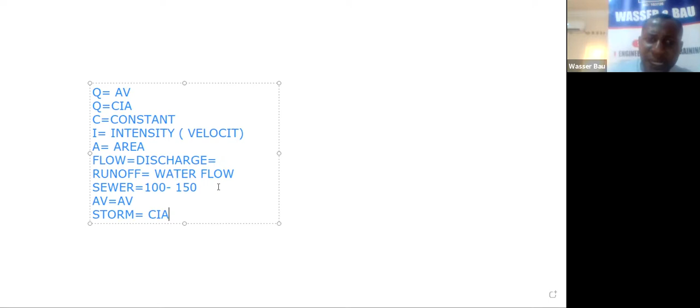Runoff coefficient. Why do we talk about C now? In the case of sewer, C is a factor of safety. C will be the factor of safety because after multiplying the specific wastewater demand for one person by the number of persons, you have to multiply by a safety factor.

We are all engineers. There's no engineering design that you do that you don't consider safety factor. This safety factor is what takes care of some unforeseen design lapses, or takes care of some escalation of population, escalation of development, change in land use, water losses. There are many uncertainties that an engineer will face.

So when you finish your design, there's always the safety factor that we put to multiply so that it will take care of some inconsistencies. But in the case of the sewer, the safety factor is defined in the code between 1.3 to 2.5. Just choose based on the number you are designing for.

But in the case of storm, your safety factor is going to come from two variables: the slope of that area, and what we call peak runoff, or the degree of paving, the imperviousness of that area. The higher the imperviousness of an area, or the higher paved an area is, the more it will contribute to runoff.

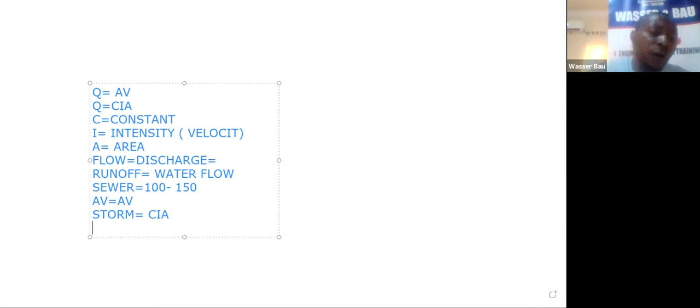...of all the rainfall that comes to it. So if you now go and do a design where all the water coming in a certain catchment is going to the drain, then you can only imagine how big that drain is meant to be.

So to curtail that, approving authorities will always make sure that you have gardens, open spaces, so that there will be a lot of shallow and deep percolation, infiltration, so that it will not be overwhelming for the public sewer.

Yeah, I'm recording, sir.

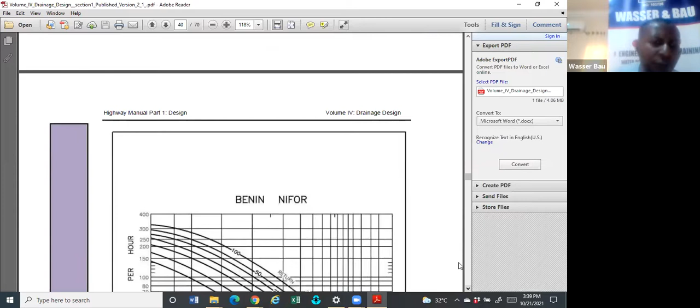So here you will see, for instance, this is what you'll be seeing in all of them. This is Benin Nifor, for instance. If you go down, you see other cities. The next one here is Bida. So if you are doing your storm design in a place around Bida, you are expected to go to the highway design manual and pick up the IDF, the rainfall intensity of Bida, for your design.

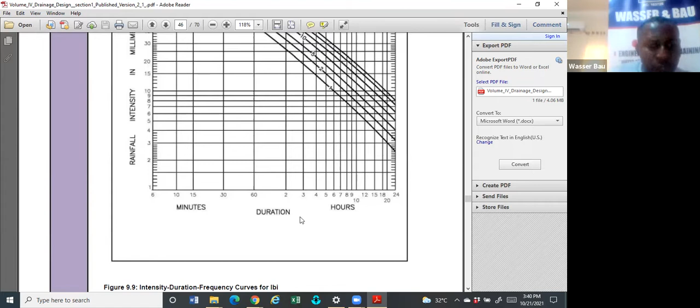So now if you go further, you see other things that might be news to you, but this is only what is in the highway design manual. Here you have the rainfall intensity on the vertical axis, and the duration on the horizontal axis. On the diagonal axis, you have the return period of each rain.

We'll still come to all those ones. Every rain has a return period: is it a 1-year rain, 2 years, 5 years, 10 years? The number of years is an indication of the probability of occurrence, which is also a function of the intensity.

I always say this: an engineer who designs infrastructure must design based on worst case scenario. This is what I tell my participants. In infrastructure design, it's better to over design than to under design. Under design is dangerous. Over design, okay, you're going to spend a lot of money, you're going to spend extra money. Somebody can tell you you're wasteful, but the design will work. But under designing, the design will fail even before it starts working.

So if you want to do your design, you need to ask yourself: am I designing against surcharge? Am I designing against flooding? Am I designing for just a normal drain? That is what will determine what line you choose, what rain intensity you anticipate, and what is the return period for that rain. So that is that for this.

The other folder you have there is the folder that contains the SWMM software. The SWMM software is an open source online software developed by the Environmental Protection Agency of the United States, called EPA. If you go to epa.gov, you type SWMM, Stormwater Management Model. The software is about 30 years old now, and it's completely free. So if you can't download it here, you can go online and download it. If you lose it, just go to the EPA website and you'll see another one to download.

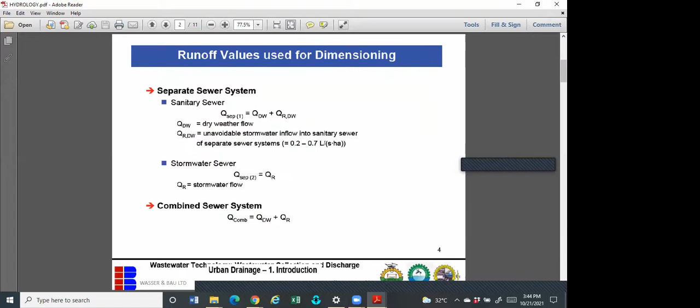In a sewer system, we have two major sewers. We have the separate one and the combined one. What is the separate one? It's where you have a separate sewer system going its way, and then you have the storm sewer going differently. The storm sewer is the one we call drain gutter.

Sorry to use that word - that's the normal one in front of your house. It can be an open drain, it can also be a closed drain, or subsurface. But the sanitary sewer can never be open - it just has to be subsurface.

Sanitary sewer is usually made of PVC pipe, because the sanitary sewer is between 150 mm to about 450 mm, 600 mm. But the storm sewer is usually from 600 mm to about 1.5, 2.5, 1.2, even up to 3 meters.

I have a friend who did the one for Asaba - he did a storm sewer of 3 meters. Jeffcon Associates did it for the Delta State government, because of the problem they were having in Asaba. That's why today water is no more a problem in Asaba. But for the sanitary sewer, the volume it conveys is so small that it's usually PVC pipe buried at a distance of not less than 1.2 meters, depending on the overburden.

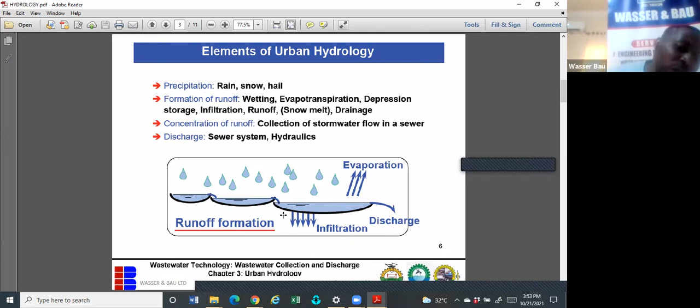So you can see, when rain falls, some will go back as evaporation, some will infiltrate, then some will discharge. So that portion that will discharge, that will cause runoff, is the portion that we're interested in.

Rainfall can be described by various variables. It must have duration in minutes, and it must have height or depth in millimeters. Combining the millimeter depth and the duration will give you the intensity.

Intensity can be measured in millimeter per minute, millimeter per hour, or millimeter per day, depending. Then finally we have what we call frequency - frequency of occurrence, frequency of rainfall, and so on.

In the past, there's a particular formula we use to calculate rainfall intensity. You multiply 166.7 by the intensity, and that gives you the rain intensity for 10 minutes at 10 mm. But don't worry about that now - that formula has been overtaken by new conventions. We'll shortly come to that.

Any rain that is less than 7 liters per second per hectare, about 650 hours per annum, is classified as weak rain. This is just classification of rain - we have weak rains, moderate rains, and heavy rains. Any rain that is more than 21 liters per second per hectare is regarded as heavy rain.

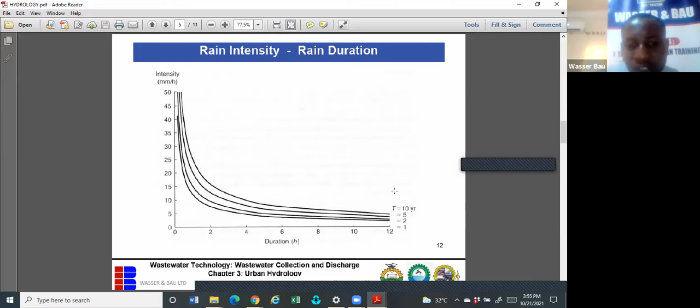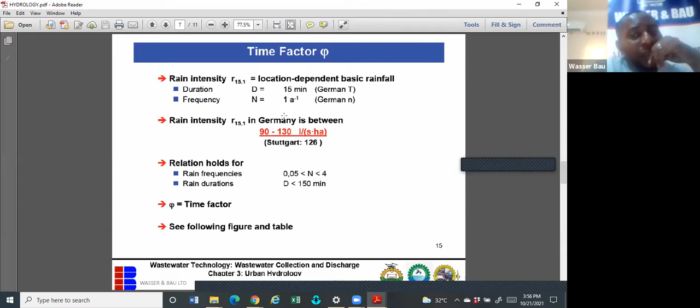Every rainfall depends on what we call the time factor. Listen, this is very interesting - the rain that will cause havoc or problems does not usually last for more than 15 minutes. We regard it as a 15 minutes rain. And the frequency is the inverse of the return period.

For instance, in Germany the rain intensity is between 90 and 130. In Nigeria it's almost the same thing - not quite, the boundary conditions, the lower and upper boundary, just change. For instance, places like Borno have rainfall intensity of about 70 millimeter per hour, while places like Lagos has about 150, for a less than 5 years return period.

If you're talking about a 25-year return period, Lagos is about 200. For 100 years, Lagos is 250, but nobody talks about 100 years. The higher the number of years, the higher the rainfall intensity. So averagely, Lagos is 150 millimeter per hour, and Borno is around 70.

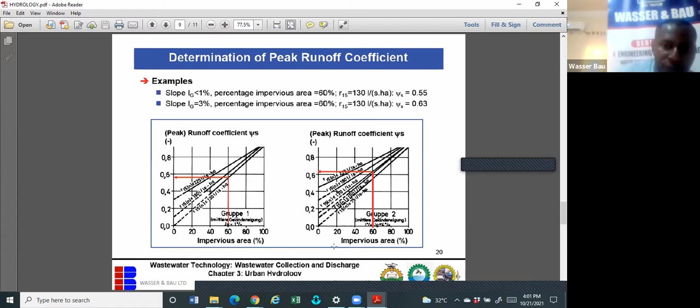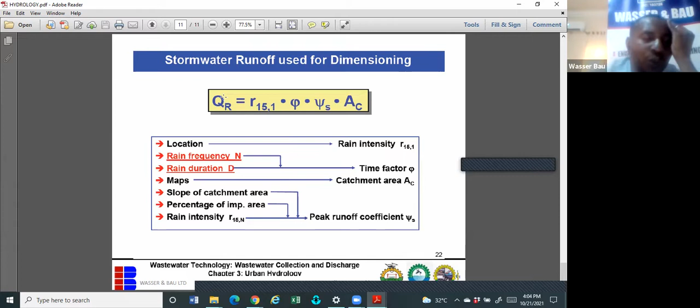Multiply the intensity by the catchment area and multiply by the peak runoff coefficient. That will give you the runoff of that area, the quantity of water it will contribute. Any question, please?

So let's go to sanitary.

In sanitary, the same thing applies. The wastewater flow, the sewage flow, is just the wastewater flow plus the infiltration water. I've said it before. But here, storm flow can be as high as 100 times the dry weather flow. Just take note. So for the combined system, it will be the storm system plus the dry weather flow.

The amount of wastewater is called specific wastewater production, represented as W, and it can be written with different units: liters per capita per day, liters per hectare per day, liters per production unit per day. Understand that this last one is for industry, since wastewater generated in an industry is a function of the production unit, not a function of capita or human.

The rainfall intensity or discharge is calculated in liters per hectare per second. Every discharge, as covered in my previous class, is calculated in liters per second. Then total discharge can be in liters per second, meter cube per second, meter cube per hour, meter cube per day, or meter cube per annum.

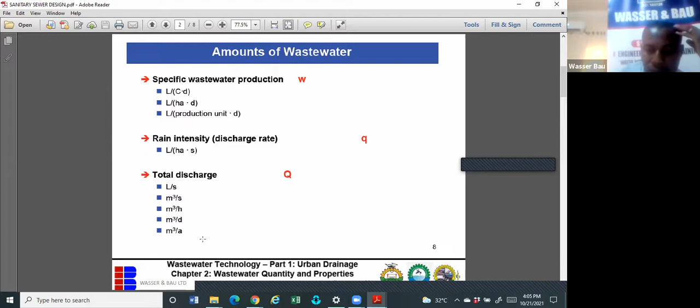The specific production of wastewater depends on the size of settlement, type of building, and wealth of population, usually between 100 and 250. Please take note, between 100 and 250. Nowadays it's about 130. Why is it going down? Because we keep on producing and developing more energy efficient water equipment.

For instance, the toilet seats we use today used to consume about 8 to 13 liters of water before, but these days the ones we're using consume only 5 liters. And if you go to some foreign countries now, their showers have sensors. Once you're there for about 5 minutes, the water will stop. If you touch the sensor, the water starts again. Why? To save water. So you can see the world is coming up with more and more simple water saving machines and equipment, and this value will keep going down.

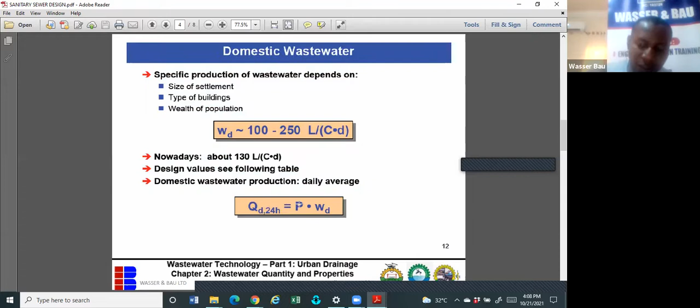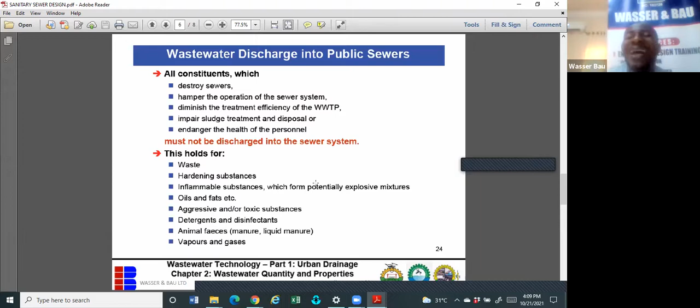What are the consequences of wastewater, and why you should not discharge them into the sewer? You are not supposed to discharge things into the sewer that can destroy the sewer, hamper operation of the sewer system, diminish the treatment of wastewater treatment plants, impair sludge treatment and disposal, or endanger the health of personnel. These must not be discharged into the sewer system. This holds for waste hardening substances. So these are the things that can cause problems: oil and fats, aggressive and toxic substances, detergent and disinfectant, animal feces, vapor and gases. These are things we don't want to see in the wastewater sewer line.

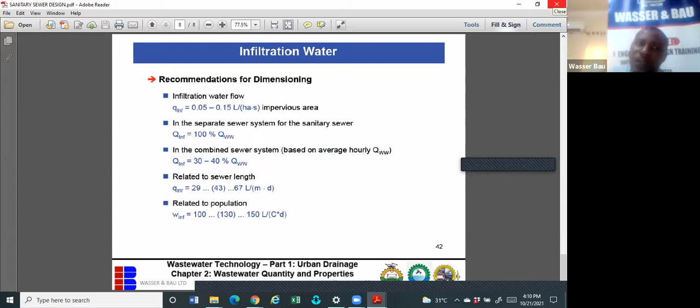Now, these are just some values. For infiltration water, you can use this. For wastewater, you can use 100, and so on and so forth. That's the end of sanitary sewer. Any question? Any question? Okay, I'm going to continue.

Okay, urban drainage. Let's talk about urban drainage, which is just two of them put together. After that, we'll discuss hydraulics and go to simple calculations.

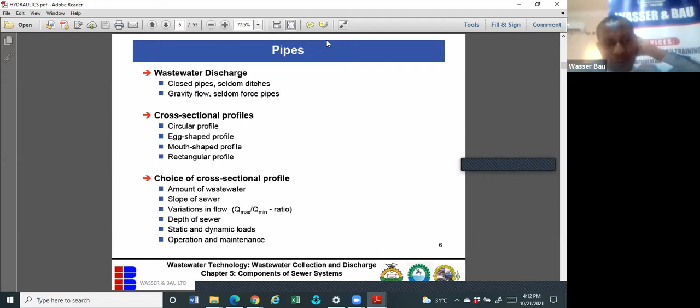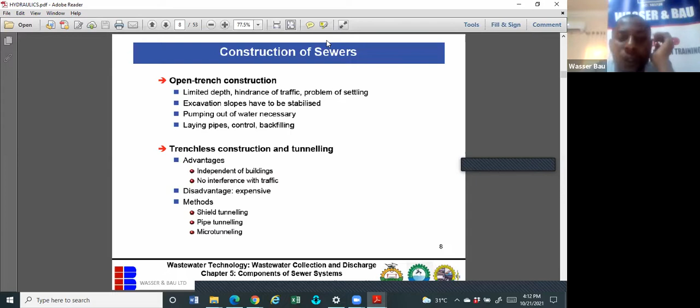These are some of the precautions and standards you need to take into consideration while doing your hydraulics. Your pipe has to be deep so as not to hinder traffic. So pumping out of water is necessary, sometimes you need to endure laying pipes, control and backfilling, then other trenchless construction. What is there?

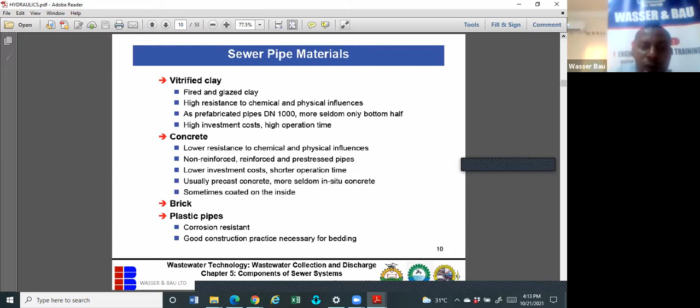Sanitary sewers are usually very small in size, while stormwater sewers are usually bigger in size.

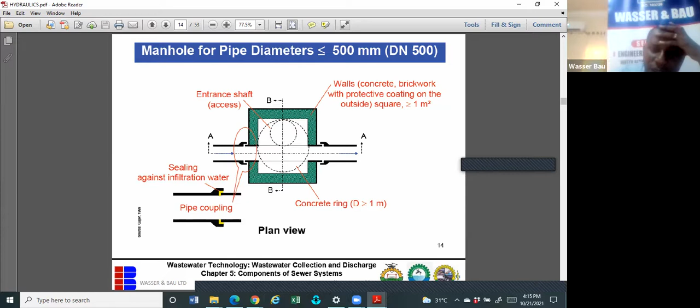So this is what a manhole looks like. If you read it, you understand it. No need to go through all of them. Just go through them, I bet you will grab it. It's no big deal.

Okay, so we can read all this and understand them. No problem about them.

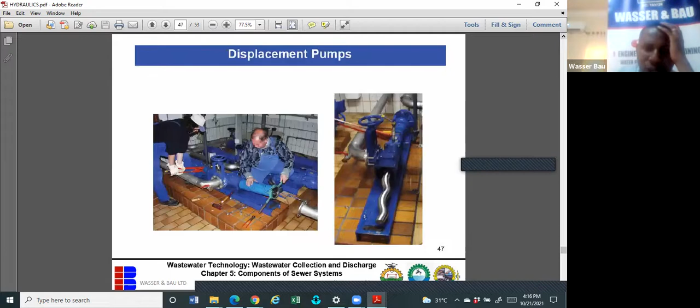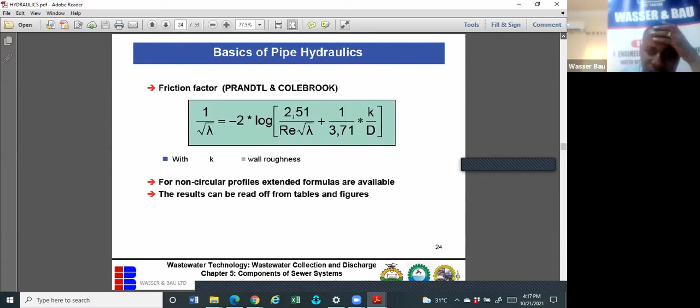So that is all we need to know about hydraulics. So as you go through all of them, you understand what hydraulics is all about, types of pumps and what they are used for.

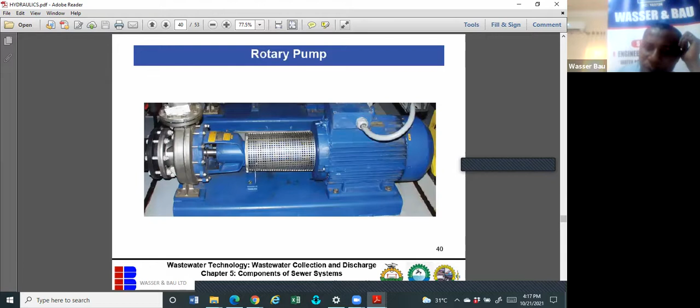This is a rotary pump and the components.

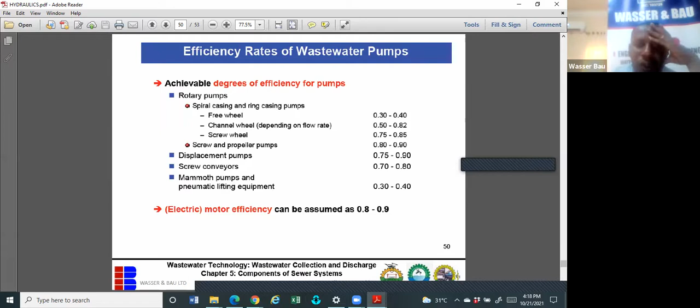Operation point of a pump.

Okay, that's all about hydraulics. Any question?

So we've done, I think we've done drainage. Yeah. I think someone's hand is up. I don't know, sorry, you say what? Sorry sir, you say what sir? Any problem? No, I don't think so. Okay.

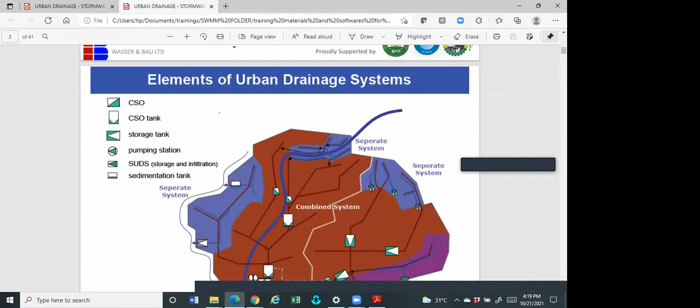So in urban drainage, there are many elements in urban drainage. You'll be encountering some of them. We have the combined system, we have the separate system. The separate system goes straight to the wastewater treatment plant.

This blue line is a storm line. You can see that the storm line will collect water from ground, from farm, and it goes to the open stream. Okay, so the blue line is the open stream passing through this catchment.

So in the combined system, or don't worry, I'll use another one. Combined system will combine both of them, while separate system will put them on separately.

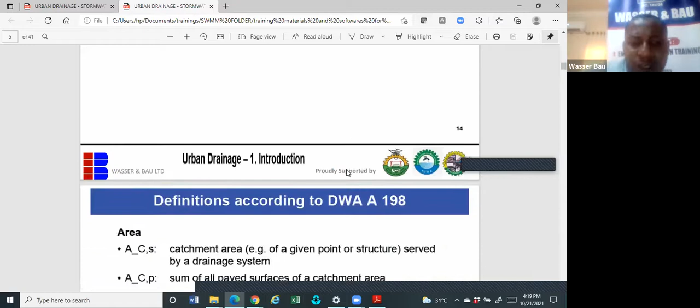So let's define some terms that we'll be using in the urban drainage system. When you see ACS, it means catchment area, for example of a given point or structure served by a drainage system. So catchment area simply means an area being served by a drainage line or drainage system or pipe. Then we have ACP.

ACP means sum of all paved surfaces of a catchment. So you can have paved surfaces, you can have NCP, which is unpaved. So if you come to a place, there are areas that are paved and areas that are unpaved. The paved areas can also be called impervious area. The areas that are not paved can also be called permeable area. Impervious or impermeable, same thing. So you should take note of that.

Then you have what we call the degree of paving. How far is this place paved? That's a function of the area paved over total area. That will give you the degree of paving.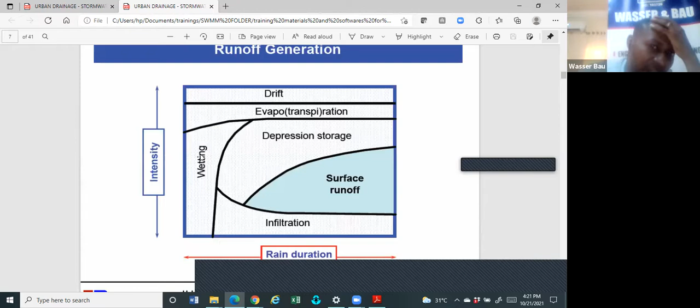So this is the runoff, the graphical representation of what happened during runoff. You see, if rain falls, some will be wetting, some will be lost as drifting, some will be lost as evapotranspiration, some will go into infiltration. Only a small percentage will contribute to runoff.

So some terms to take note of: constant rain intensity does not generate constant runoff. Maximum runoff occurs only after initial losses - wetting, depression storage, etc. are covered. Higher your degree of paving leads to less infiltration, therefore higher runoff. If you pave your house or use interlock everywhere, only a small amount of water will infiltrate the ground, meaning the volume of water coming into the drainage system will be high. Combine that function with time of flow and slope of the area, you come up with what we call runoff coefficient, or peak runoff.

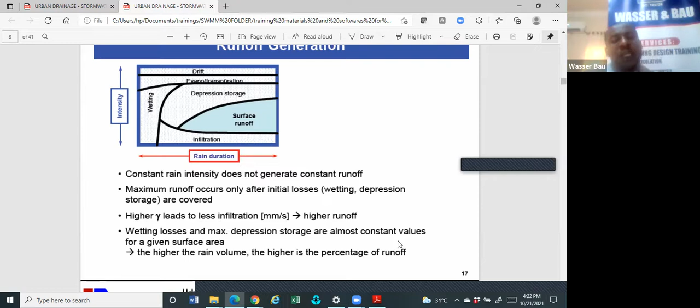The higher the rain volume, the higher is the percentage runoff. So if the rain intensity is much, definitely paved or not paved, relatively the volume of rainfall will also be high.

So the formula for runoff, once again, is you multiply the rainfall intensity by the catchment area by the peak runoff. This Q sub D,N simply means the runoff at a particular duration at a particular frequency. The catchment area is the area of the subcatchment, then you multiply by the peak runoff. For a given surface, the ratio between precipitation and runoff depends on the rain intensity and varies over time. Runoff coefficient can be given only for certain conditions - we need different values to solve specific problems.

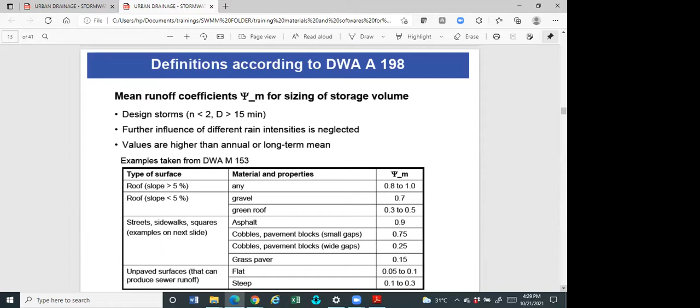Now, how do you get your mean runoff coefficient? Number one, it's a function of the rain intensity. Then again, it's also a function of the surface material. Not every material contributes the same level of runoff. Some materials, when water falls on them, will hold the water; some will release the water and it comes as runoff. So this table shows you different materials and their corresponding peak mean runoff.

For instance, roof is between 0.8 and 1, be it asbestos roof, long span, or any kind of roof, because they don't hold water, so water just flows out - that's why it's very high. Gravel is about 0.7, green roof is between 0.3 and 0.5, asphalt is about 0.9. All of us know that asphalt does not like water, so once water touches it, it goes out.

Cobbles, pavement blocks with small gaps like interlock is 0.75; those with wide gaps, 0.25. Grass paver, when you pave with grass, is 0.15. If the land is flat it's about this value, if the land is steep it's about this value. So you can see that steepness and the ability to retain water is what contributes to the peak runoff factor you use. This peak runoff is just a safety factor - it takes care of the fact that not every rain that falls here goes to the drain. Some is lost by infiltration, by evapotranspiration, by wetting, by deep infiltration, and then finally some comes out as runoff.

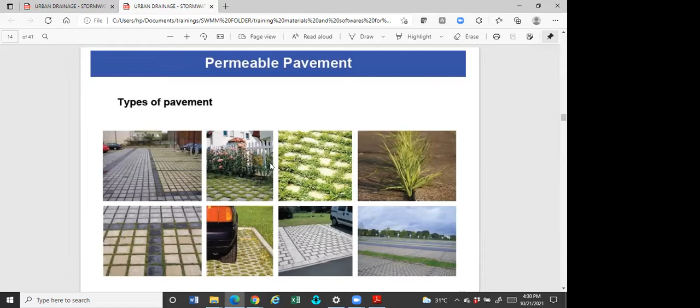So you can see an instance - look at these surfaces. You'll agree with me that not all of them will contribute the same level of runoff, because they all have a different level of gaps that could take in water.

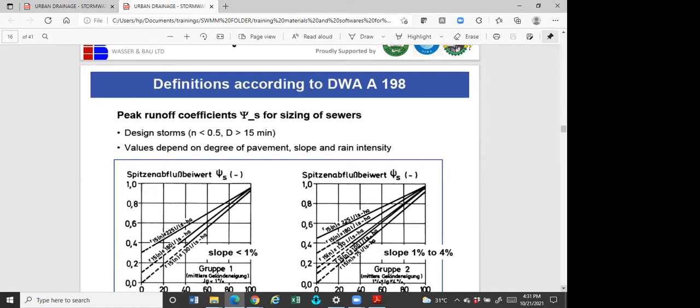So the question now is, what value of mean runoff should you use? Well, you consult tables, and after consulting the table, you also consult the slope. The higher the slope, the higher the runoff. So if you know the place you are designing is very steep, instead of using 0.7, you can start to use 0.75. You just upscale it a little bit to take care of the slope, because a sloping ground generates runoff easily.

This table shows you that depending on the slope of an area and the degree of paving, you can get the peak runoff coefficient. You have class 1, class 2, class 3, and class 4 slopes. Class 1 is for slopes less than 1%. Class 2 is for slopes between 1 and 4%. Class 3 is for slopes between 4 and 10%. Class 4 is for slopes more than 10%. If the rainfall duration intensity is 225, and the degree of paving - meaning the degree of covering of that catchment - is 50%, then the runoff will be around 0.72.

So there are many tables like this I've been encountering. Just remember, on unpaved areas, the runoff is close to 0, while on paved areas, the runoff tends to maximum, which is 1, meaning that anything that comes as water also leaves as water.

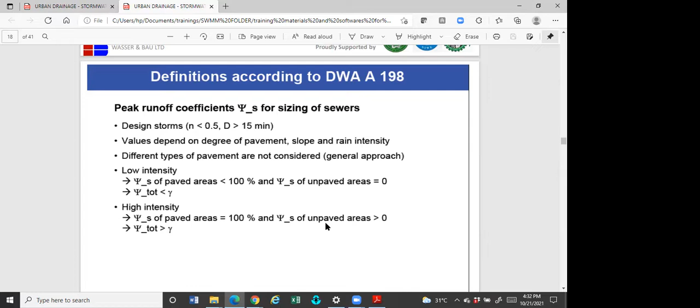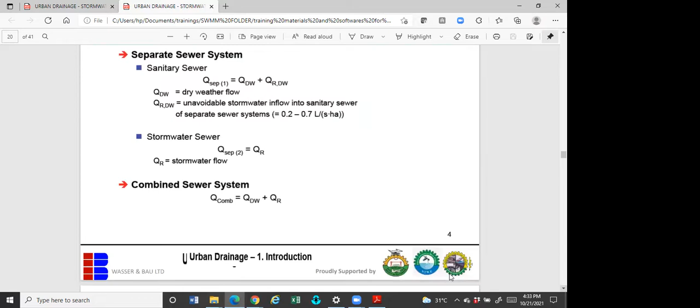The next one you have here is catchment area. I've explained this before - we have area of impervious. What I want to bring out here is that once you've multiplied your catchment area by the runoff coefficient, the new area you get is called impermeable surface, or impervious area, and that is the real area contributing to runoff.

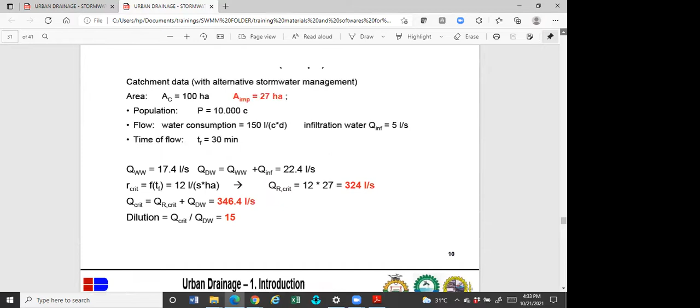So this is what I was trying to explain from the beginning. Watch me, stay with me. We've talked about this before. So let me give an instance now.

Combined sewer: the area of the catchment is 100 hectares, but the area of impervious is 27 hectares. It is this 27 hectares that is contributing to runoff. How do you get 27? You must have multiplied this by 0.27, which means the peak runoff coefficient used is 0.27. So this 27 is now the area contributing to runoff. And the population is 10,000 people, so the water consumption is 150 liters per capita per day. Infiltration water is 5 liters per second.

And the time of flow - I need to explain that too. Time of flow means what time does it take water that falls at point A to flow to the outlet at point B inside the drain. Normally we use a time of 10 to 15 minutes as our time of concentration. Please take note: even if the rain falls for over 1 hour, we're not interested - our job is to take the first 15 minutes.

So when you calculate the wastewater flow, it becomes this multiplied by this, then you apply the safety factor to the wastewater. If you combine it with 5, you get 22.4. So you can see the dry weather flow here is the wastewater flow plus the infiltration flow. The infiltration flow here is fixed, and all of them are always fixed.

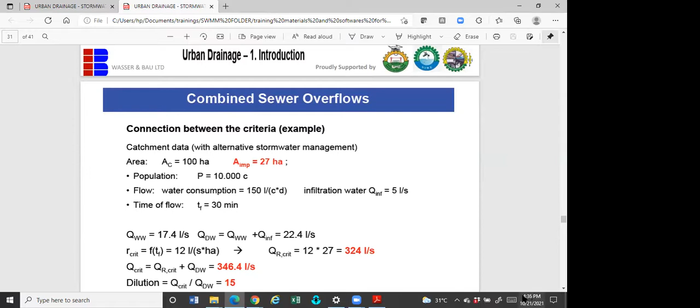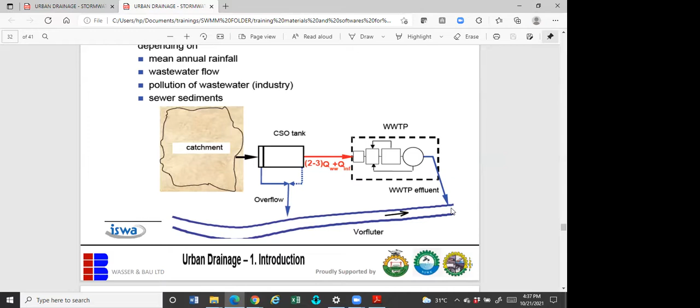The same applies here. For the combined system, you can see that the two are combined until they get to what we call the overflow structure, the combined overflow structure. From there, some will go to the treatment plant to be treated before being discharged, while the overflow will go directly into the open water body.

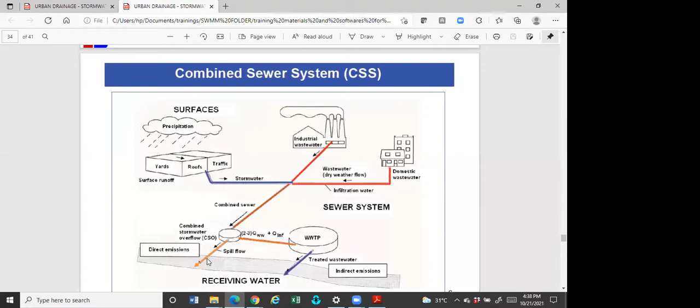I think that's understandable - combined sewer system, separate sewer system. So for the combined sewer system, there are some points. Let's read this so we'll understand it, but let's not go through all of it, just really understand it.

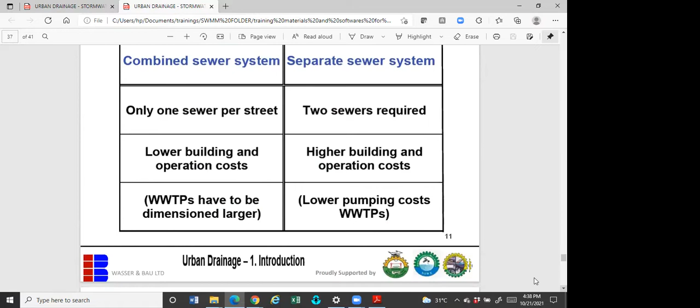These are technical issues - choice of sewer and so on. The modified system is just like a combined system, too much.

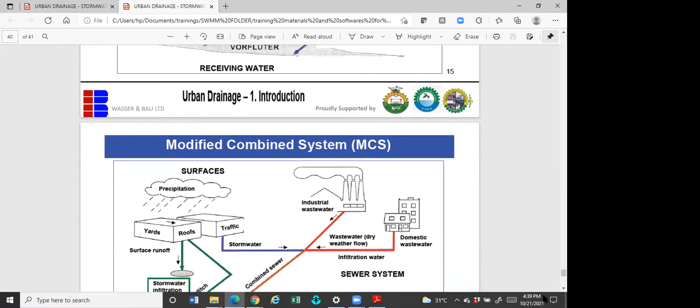Okay, we've treated this. So the advantages and disadvantages of the different systems to choose from - that's not really necessary. Okay, that's the end. So, any questions?

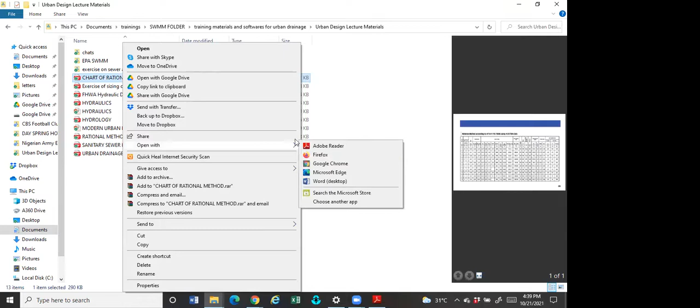So this is what we're going through when we come back. You all can see my screen, of course. So, okay, now for the rational method...

It is one of the most advanced methods for designing sewer and stormwater systems. Gentlemen, if you can grab it, I will be satisfied. If you can understand these charts and develop one on your own, then you have become a guru in sewer and storm infrastructure design, because you cannot do sewer and infrastructure design without these charts.

It's not possible. So this chart is more like your calculation sheets. I would like you, when we come back from break or while we're talking, to open it. It is called the rational chart - rational chart of the rational method. Please combine it, that is where we are going next.

And then we'll be doing one exercise, this exercise here. That's the exercise we'll be doing. If you can grab it, then these are how it will be done.

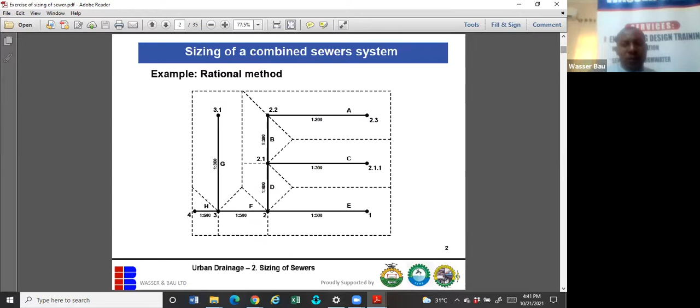All this here will now be put into proper perspective. Then let me see if I have a chart of something I've done before, before we go for this break. I think I saw something.

Let me see if I have a chart - I see something like rational method modified. Let me check so I can send it to us, so that instead of you starting from scratch, you can start inputting your own data in the Excel already. That's the idea. Oh, cool, this is cool. Okay, let me share with us.

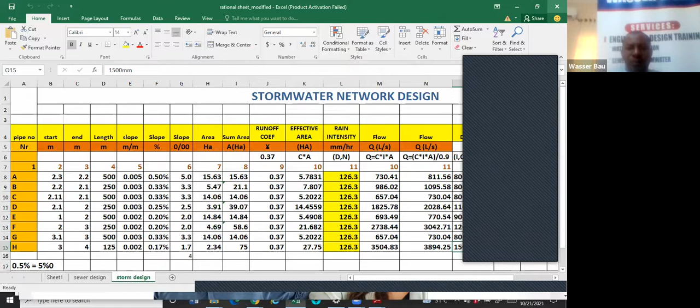So to share with us, what I need to do is go back to my folder, the folder I sent to us - I don't know what is in that folder. Please, do you see anything like Excel sheets that have been pre-formatted?

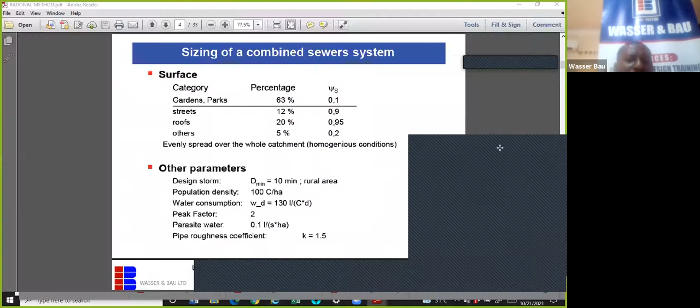Divide by 100 to divide by the total area. So for instance, now how do I do this now? I have my options, so one, I'll come here. I will say 63%, which is 0.63 anyway. I can say 63 multiply by 0.1, plus, that's how to calculate mean weighted average.

Plus the other one is 12%, multiply by 0.9, plus 20%, multiply by 0.95, plus 5%, multiply by 0.2. Then at the end of the day, you divide everything by 100%. You will get 0.37, that becomes your average.

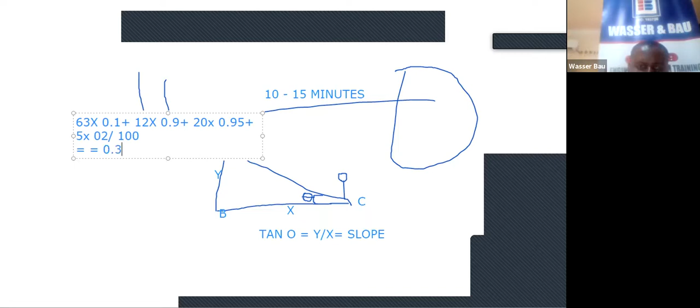But if you are done 0.1 plus 0.9 plus 0.95 plus 0.2, here is 0.2 please, you cannot get that divided by what?

That will be divided by 4. 1, 2, 3, 4. Yeah, divided by 4, which is the normal average we do. So sorry, let me take your time. Let me just do it, to show you how mean weighted average differs from other averages.

0.1 plus 0.9 plus 0.95 plus 0.2 divided by 4 gives me 0.53. So can you see 0.53 is now the mean average, but 0.37 is what we call the weighted average. The weighted average gives you a better representation of what should be.

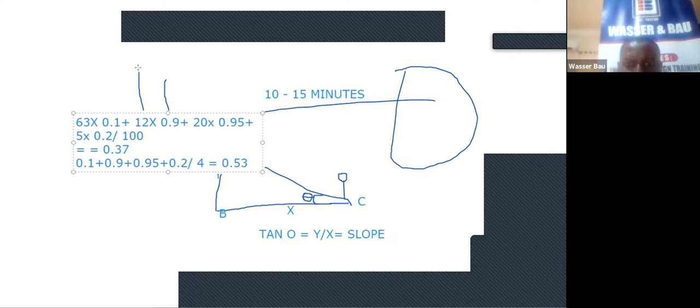Okay, so we've done that. We'll pass that. Now, after that, you establish other variables, or what we call takeoff, as we do in design.

We're using a 10 minutes storm. I'll explain why, remember I told us between 10 minutes and 15 minutes. For the population, for the sewer, we are using a population density of 100 capita per hectare. In other words, we are saying 100 people per hectare.

What you do, you improve on these ones. Maybe you assume that garden is only 0.2%. Do it from here. Thank you. Well, that's a good question.

Or when you got 0.37, you say, based on the changing and irrational construction taking place, urbanization of Lagos, 0.37 will be escalated to 0.6. Yes, but that does not change the advantage of using mean weighted average.

Okay, now we're using a population catchment of 100 people per hectare. That is what we call population density. Then we are assuming that water consumption is 130 liters per capita per day. We are choosing a peak factor or safety factor of 2. Then we are choosing infiltration water of 0.1 liter per second per hectare. And for the pipe, we are choosing a pipe roughness, or concrete pipe, of 1.5.

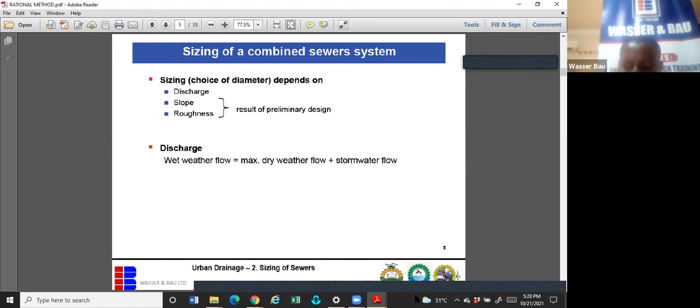So let us calculate the wastewater flow first. Let us get the wastewater flow. The dry weather flow, now the wastewater flow, is multiplied by the population density, multiplied by the safety factor. You add the safety flow due to infiltration, and you get your flow.

So here we say that the specific wastewater flow is 130 liters per capita per day. Population density is 100 capita per hectare. This 86400 is converting...

...liters per day into liters per second. So 1 day is 24 times 60 times 60. That will give you 86400. If you remember those days in school, converting day to seconds, multiplied by 86400.

Then 2 is our safety factor, and 0.1 is our infiltration flow. Okay, so liters per second per hectare becomes 0.1... 0.401 is now the quantity of water flowing out of this catchment per hectare.

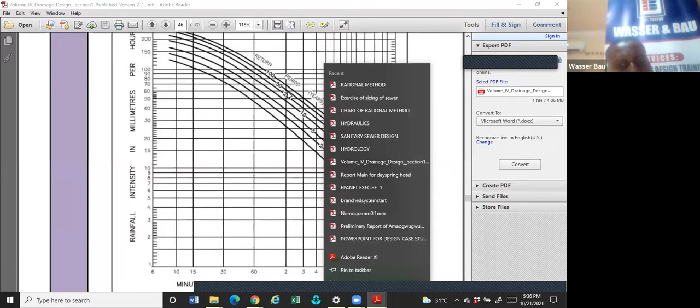So when we say you use, what do we mean? What we are trying to say is that if you go to your charts, you will see 10, 25, 50, 100. So if you come here, you choose 15 minutes rain and you go up. 1 year is about 100, 2 years is about 130 or bigger, 10 years is about 140, 25 years is about 170. You can see that as the number of years is higher, the intensity of rain is increasing. That means your sizing of your member will also increase because it has a direct proportion.

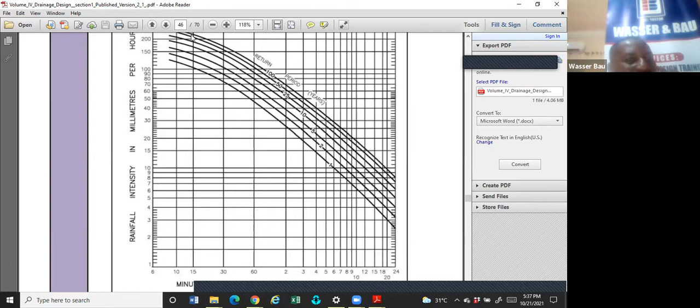And then 50 years is about 200, the 100 years is about 250. But nobody designs for 100 years. 100 years is too high. If you design for 100 years, your drain size will be like 5 times what other consultants use.

And that is why sometimes choosing the return period is a political decision. When you go design for your governor or local government and tell them to use a 2-meter drain, they might start laughing at you. But you and the engineer know what you've done, because you've designed it so that even in 100 years, the system will not flood.

But nobody asked you, because if that place is a rural area, please limit yourself. 2 years. And if you design with 2 years, you should be getting something like 0.9, 1 meter, 1.2, or even 0.6. That is the import of this, that is the idea of this. That is why you need to choose the appropriate one.

As an engineer, as a consultant, you must justify it to your client. I told us the experience where we used 0.8. I told my client that 0.8 is too high, but he said go ahead and use it. And the drains were very massive. The minimum drain there was about 1 meter trapezoidal, 600 bottom, 1 meter top. That's by the way.

So where are we now? Okay, here. So you can see this is how to get your N. Your D, how do you get your D? D is usually fixed, usually 10 or 15 minutes.

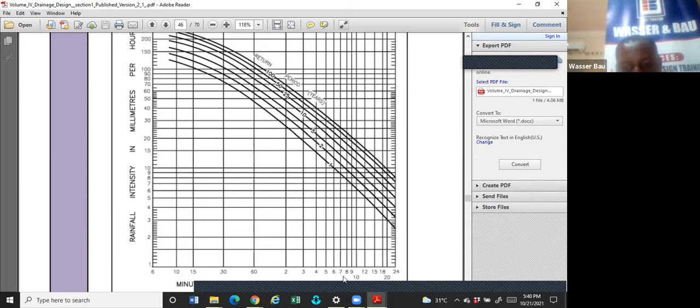So that is how to get your N and your D. So what do we do next? I'm moving forward. The next thing is that D is also influenced by the slope.

If the slope is less than 1% and the degree of paving is less than 50%, choose 15 minutes. If the slope is less than 1% and the degree of paving is more than 50%, choose 10 minutes. If the slope is between 1 and 4%, choose 10 minutes, or if the slope is more than 4% and the degree of paving is less than 50%, still choose 10 minutes. So if you look at this criteria, you find out that 10 minutes is more, and that is why we normally choose 10 minutes in our storm design.

So now, the concept of the rational method. Choose your return storm frequency, N. Estimate flow time in the upstream system. Consult the IDF curve for corresponding rain intensity, R, a function of D and N. Then calculate the wet weather flow. These are the steps you're going to take.

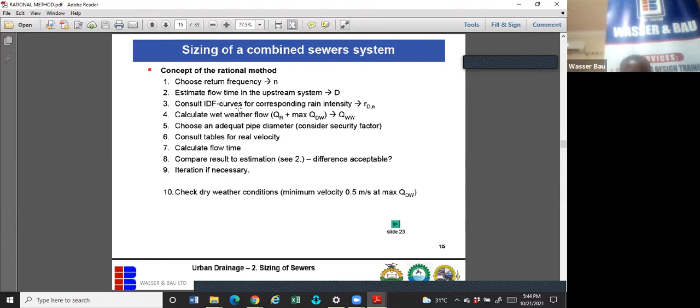So what you're really interested in is finding your slope and your discharge. Once you get your slope and discharge, you are good to design your pipe. Every other thing here is not too important—those are just checks to check. So these are the 10 steps you're going to take to design your sewer system.

Let me give you an example, for instance, for the wastewater flow. This is the pipe number, pipe A. This is the beginning of the manhole, the beginning and the end—you know that at the beginning and the end you are meant to put a manhole there. This is the original catchment of pipe A.

So if you now multiply the catchment area by the dry weather flow—what is dry weather flow? It's 0.401. This is dry weather flow, measured in liters per second per hectare. If you multiply this by the area in hectares, you get the value for the wastewater flow for this particular catchment.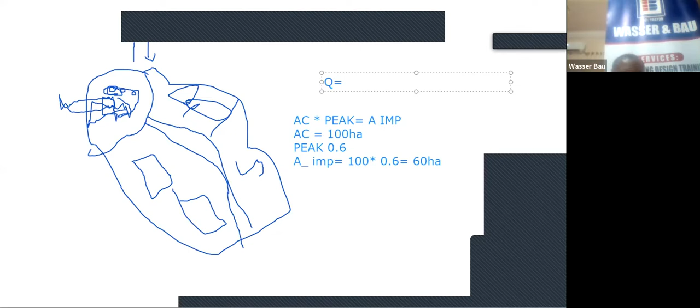So if you multiply the area, remember our universal formula which holds in every area: Q equals AV, which is area multiplied by the velocity of discharge. When I say discharge, it's in liters per second.

Why is it in liters per second? Because the discharge, represented as small q, is the wastewater flow of one person per capita, multiplied by the population density.

We know what the population density is—it's about 100. So we don't know the number of houses that will be there, but we know the population density. Then multiply by the safety factor. If you multiply these three things together, it will give you the Q.

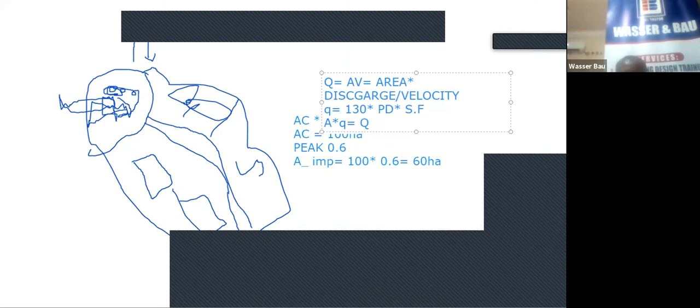So if you now come to our chart here, which is what I'm interested in, we just find out before we close for today. Tomorrow we're going to focus on this chart and how to develop it—that will be our work for tomorrow. I'm trying to lay the foundation today; the foundation is what we're doing.

So if you come to this chart here now, you take the catchment area and multiply it by 0.41, and it will give you this value. This area multiplied by 0.41 gives you this, and this area multiplied by 0.41 gives you this. So if you multiply the whole area by the wastewater flow coming from those catchments, it will give you the corresponding discharge coming from that catchment.

So the next thing you do is aggregate. If you aggregate this catchment, you will find the cumulative discharge. Why are we talking about cumulative? Everybody listen and get this clear: when the wastewater comes from here, it flows into catchment B, so catchment B becomes bigger. Then catchment C flows into it at this point and it becomes catchment D, which becomes bigger. Then catchment D, E flows into it—are you with me?—it becomes bigger again. This catchment now flows into this one, and it becomes bigger.

And what does it mean? Look at it here. A flows into B, B becomes A plus B. D becomes flow from B plus flow from C, plus itself. Remember that B is A plus itself. D is now B, which is upstream, C, which is upstream, then himself, D.

And G, what is G? G remains itself. Why? Because G is independent and it does not have upstream.

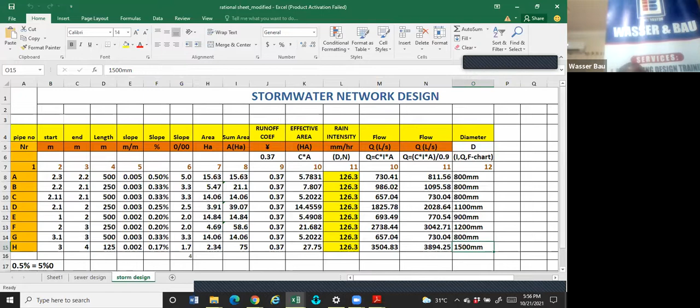So stormwater, okay, this is for stormwater, the same thing. Okay, this is for sewer, it's the same thing. So what do you have here, gentlemen? You can see the length is 500, the slope is this here, convert the slope to percentage, then the area is this, the flow is this.

Then from this, you go to your chart and size it out. So to size this one, this first one says 6.27. So what I will do, I'll go to the charts. See this folder called charts. This chart, you use one that is 1.0, the roughness, because the roughness we were given was 1.0, which is concrete pipe. You choose this one, you choose this.

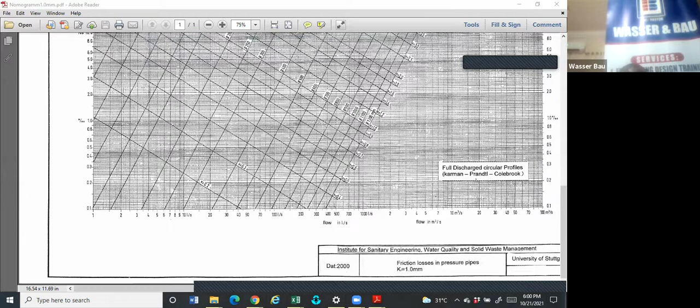So I'll size it against 5. So when I come here, stay with me, let me pick up the line. So this is 6. Okay, so when I come here, I pick up 6.2. I'll go against 5. This is 5.

It's falling between 2 pipes, between 2 lines. These are the 2 lines. So this pipe is 100 mm, while this one is 125 mm. It means that any pipe between 100 and 125 mm will serve. But the law says you choose the biggest of the two, which is what one of us asked me, the one that is on the side of safety.

So when you get this, you choose the biggest of the two. The reason is that this is a chart. All of us use charts in this. Chart does not give you a precise figure. In fact, engineering is approximation.

So when you are between the devil and the deep blue sea, if you are someone that can swim, you can choose the sea, since you can. So in engineering, when you are confronted with two parameters, like 100 and 125, you choose the biggest one, the one that's on the side of safety.

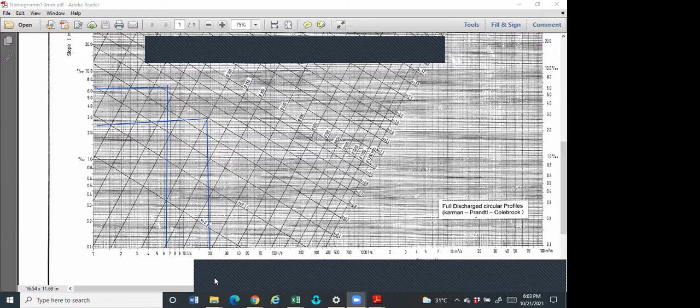So this is 15.67, so let's say it's 16. Against 2.5, sorry, this is 2.5. It's exactly 200 mm. So I'd like us to take a look at this. So you can see that this one is now 200 mm.

So that is how you do all of them. But all of you just calm down. What I have done today is introduction. I'm not supposed to, in the previous training, I don't go this far. I don't go this far, but I want to give you a heads up so that when you go back today, please, I give indulgence.